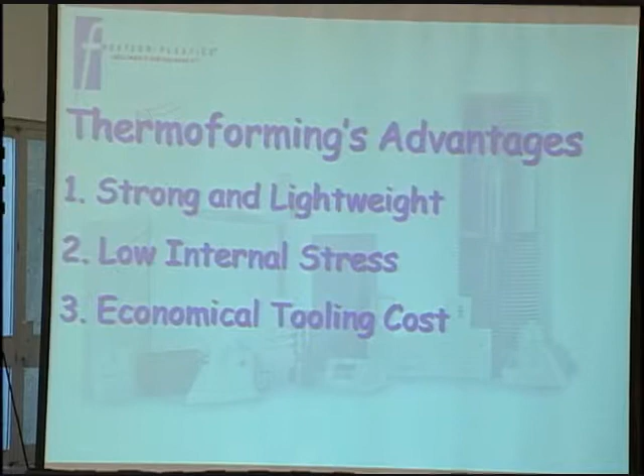So what are thermoforming's advantages? Why should we thermoform things in the first place? Well, first, it's very strong and lightweight, as evidenced by those packages you can't get open. They're very thin plastic, but they're very strong. They also have low internal stress, which gives them high impact strength. And they have low or economical tooling costs, so there's a big advantage there too.

For example, on the lightweight aspect, if you were to take a RIM part, a reaction injection molded part, and hold it next to an identical thermoformed part, there'd probably be a 25 to 40% weight reduction in the thermoformed part, and the impact strength would be nearly double.

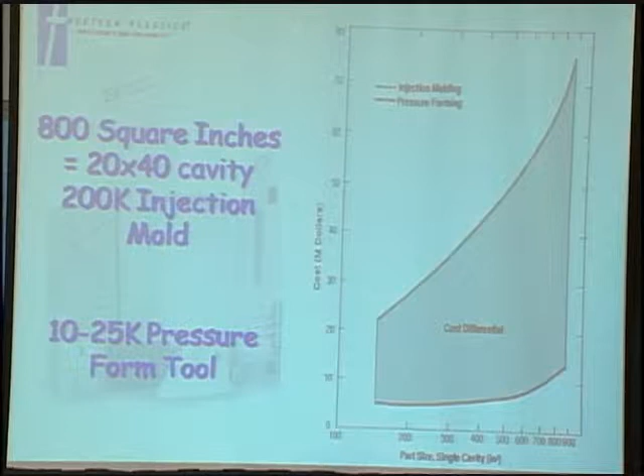The economics for tooling are pretty interesting. We've used a 20 by 40 cavity here as an example. If it was injection molded, ordering that mold in this country would be about $200,000. If you pressure formed it, it'd be about $10,000 to $25,000, depending upon complexity, slides, and how many undercuts you did. But there's a significant savings, and as the parts get larger, the savings get bigger. So when you start getting into parts that are 36 by 48, 48 by 48, 48 by 72, the cost difference between thermoforming and injection molding becomes really significant.

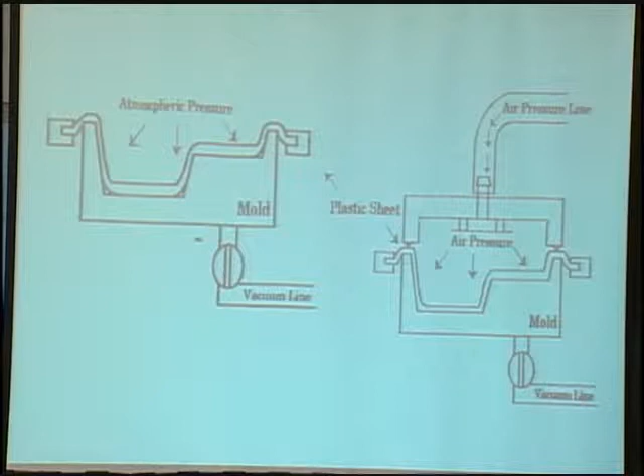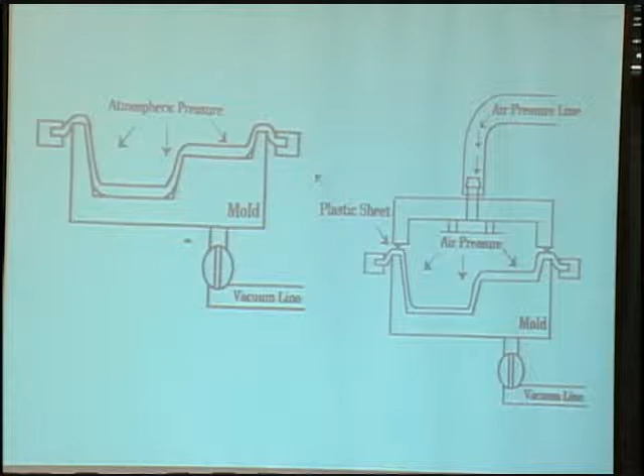The basic difference between vacuum forming and pressure forming is vacuum forming uses atmospheric pressure. That means the most pressure you can get on a part at sea level with a perfect vacuum is 14.7 pounds. If we seal it in a pressure vessel and pump 70, 80 pounds in there, now we not only have the 14.7 from atmosphere, we multiply that by 3 to 5 times. There are some machines, and we have one, that are capable of doing 268 psi, at which point you can pressure form composites.

Just another example of the difference in the way that the sheet adheres to the mold.

A lot of people use pressure forming in parts that are going to be lower cost, for example, than maybe an injection molded part. And quite often they're used in conjunction with sheet metal.

So we ask the question, what can you do with a square box? Well, you could just leave it a square box, and that's called a refrigerator normally, and they don't look very interesting. Or you can dress it up in front with a really nice cover, and that's what Hewlett-Packard chose to do on these particular units.

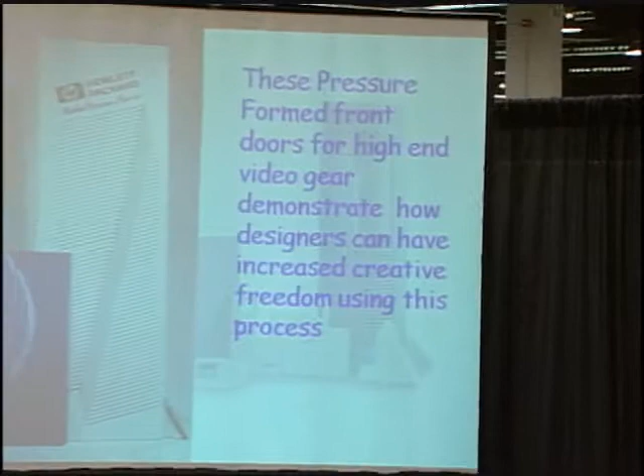And they were for high-end video gear. These were the first video online, on-demand servers there ever was, and they were trying to sell these to the phone company, and the phone company had started to buy them. And then the phone companies thought, well, why don't we just buy the cable companies? And that's why you have AT&T Cable today, and they kind of shelved this project.

Funny story, NYNEX in New York, a friend of mine happened to be the vice president of technology for this division of HP, and he's in talking about all the whiz-bang servers and electronics and stuff that are in there, and the president of NYNEX turns to him and says, 'Al, that's really a nice door.' I love that story.

This is that surgical laser we were looking at earlier. This was for general use, and the big use ended up being facial resculpting. It was the first facial resculpting laser, and they could knock sometimes 20, 30 years off of somebody. I saw some of the videos, and it was amazing.

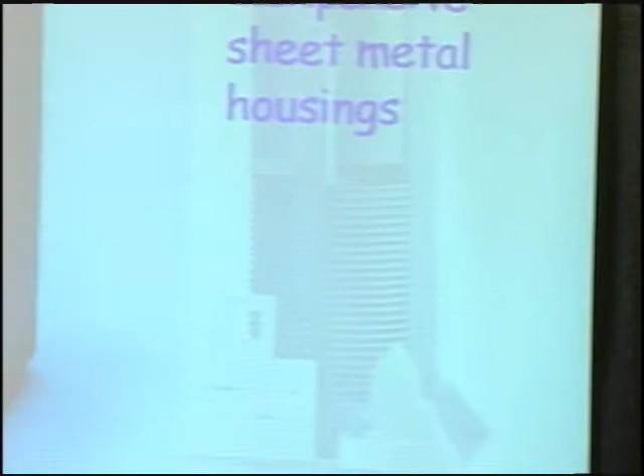Here we have another basically a square box, and simply by putting a cover on here, took a very inexpensive package and made it a very nice looking part.

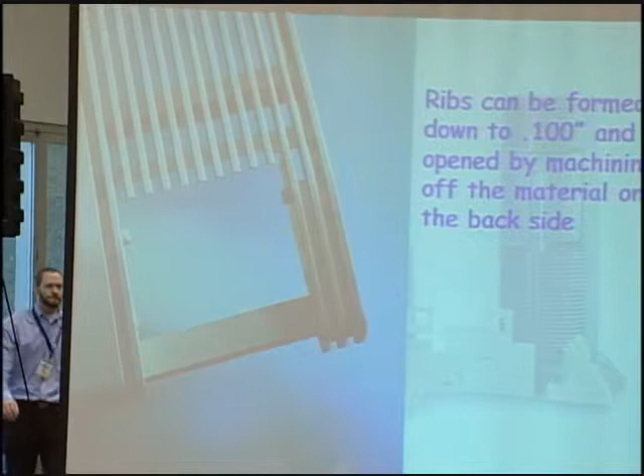Ribs can be formed down to 100 thousandths thick, so you can really maximize airflow through a part, and we'll show you a part later where that was very important.

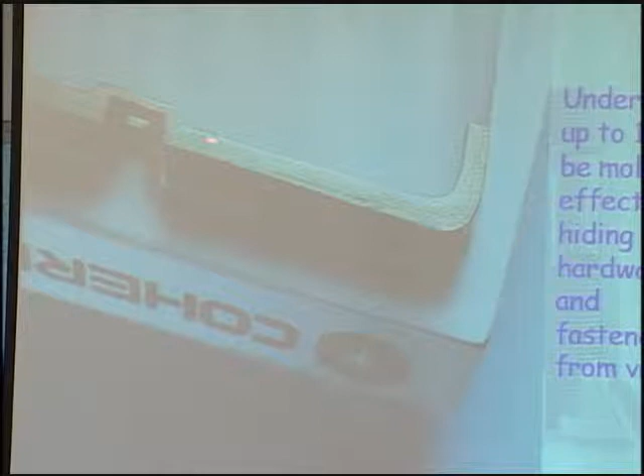Undercuts can be molded. Really, we say pretty much up to an inch, no problem. If you need something more severe than that, then we need to talk about the way it's designed, but generally a 1-inch undercut is not any big deal with a really good quality pressure forming process. Here's the reason for that. Now we've got all these recessed areas, we can hide all the hardware.

And the other thing we can do is we can mold features down as small as 40 thousandths. In some circumstances we can even mold features as small as 20 thousandths, raised features. And we've got a couple products in the booth that will demonstrate that.

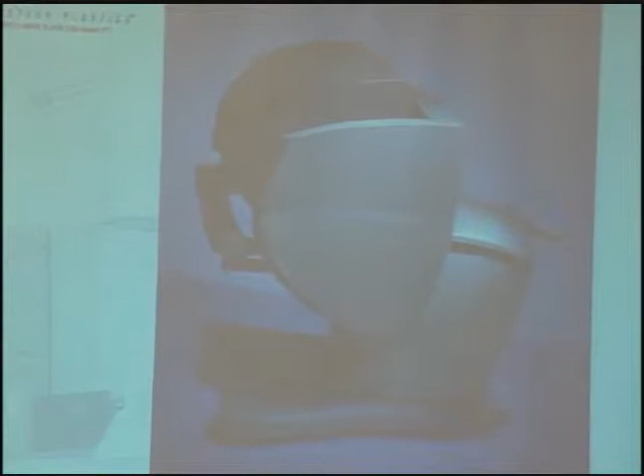Here was the first surgical robot. This is the Intuitive Da Vinci surgical robot that actually won grand prize here a few years ago for best medical device, and it won every major design award, and every major plastics, thermoforming, and manufacturing award in the country. And the difference, they've changed this quite a bit.

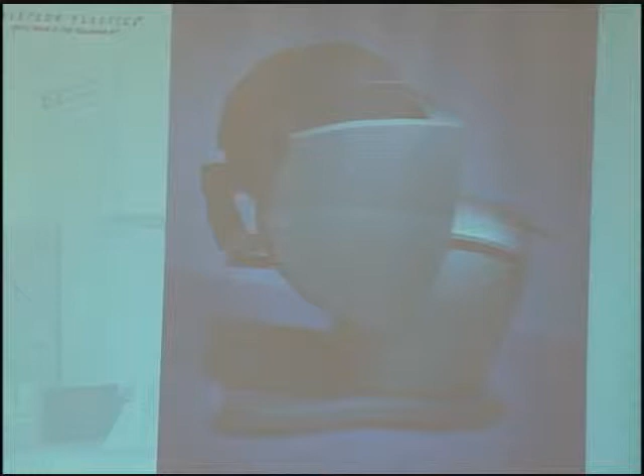At the time, all they had was cathode ray tubes, and they had to stick two cathode ray tubes in here to get the stereo vision. And so that's the reason this top cover is so big. If you've seen the newer Da Vinci, the top cover is much, much smaller because now they have some really good flat screens that they can put in there that are really high resolution, and it eliminated the need for a lot of the technology that we put in this part.

The surgeon would sit here up to 12 hours. So another thing that we did is we molded some undercuts along this side, because most people would have just trimmed that and it would have just been a sharp saw cut edge, maybe with some paint and been sanded down. But by putting a nice rounded edge there, when people were in there bumping it, it just didn't add to the aggravation of the doctor trying to work in a pretty delicate situation.

One of the things we like to do with people, we work with a lot of industrial design firms. We try to get in early on the project, because if we're in early, that helps us in the sense that we can help you with the technology needed to make these little improvements that are really only paid for once in the tool, and it doesn't really matter because the amount of time it takes to trim the part out is going to be the same.

This is another example of a square box being dressed up. This particular unit actually won an ID Magazine award back in 1989. But really the interesting part is the story behind it. When this company came out with this, it was the first desktop genetic reader.

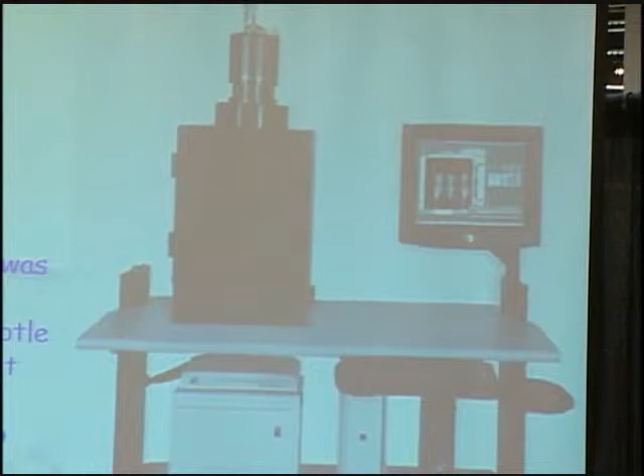This is a big camera up here, and they wanted to try and make this thing look a little more refined. So here's what they did.

They took the camera and they put it up here and put it under this translucent dome. This part's over in our booth, we're over in 1883 — there's my commercial plug.

This part's in our booth, and you can actually see this, but they put the camera up here, and this is where they put the mice, and here's the valve they use to turn on the gas, and the rest of the electronic equipment is down here for it. So they condensed this all down into one bay size.

They wanted a really nice monolithic look. They didn't want anything sticking out, so we molded in all sorts of undercuts on this so that when they were all done, they just had a super, super clean look.

The letters here that you see are raised up a quarter of an inch, and then the actual letter area is molded back down inside so that those are laser cut inlays and can sit down in there, so you don't snag anything on the edge of them by having them set back in there.

Here's another undercut. We were told by our tool maker that this wouldn't work, and they didn't want to finish the tools, so we said, look, just do what we tell you, we'll pay you for the tools whether they work or not. That's sometimes the argument you have with tool makers, because they don't know what you're doing and you don't want to tell them what you're doing.

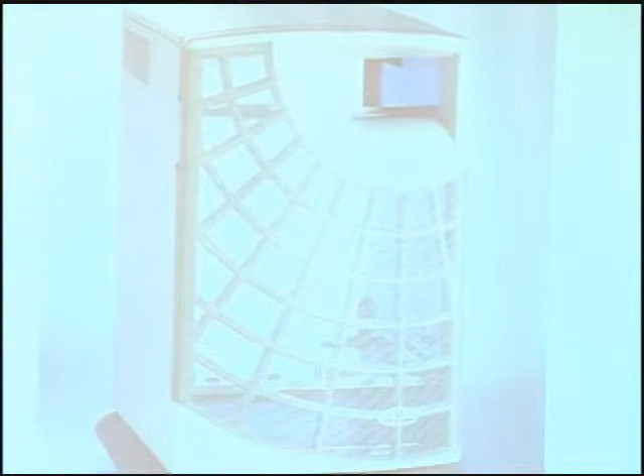This was, we jokingly refer to this as Spider-Man's server. The individuals, back when Lucent was still a standalone company before it got bought, this was a desktop server, and what they normally did is have these in a rack mount off in a server room somewhere, but every once in a while they needed one out by a desk or remote. So they came up with this enclosure.

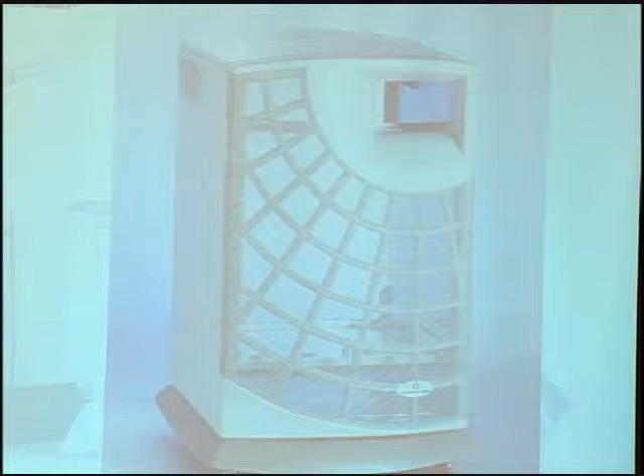It's really simple, a sheet metal box with a top and a front cover. They needed maximum airflow, and that's the reason for that design, and then this skirt down here. So there's the back of the front cover, and the front of it. The whole idea was that this perf was to go on, and it clips on the sides of the cover, with just one tab you bend over to hold it in place.

Here's another, let's dress up something that's in a rack mount environment. What they were trying to do here is, this was the first box that basically converted internet to cable. In fact, there's gazillions of these all over the country, and basically they got it so you could start getting your internet through your cable system.

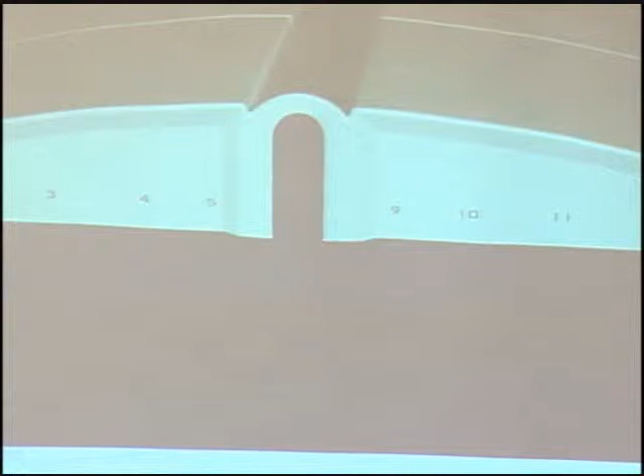But what they were trying to do is put a lot of information into this panel, so they wanted to know where all these were, and they wanted to get it underneath, out of the way where it wouldn't wear off. So we molded an undercut, and then they wanted the sides to be the handles, so we molded an undercut in over there. There's another better shot of it.

And again, it all had to slide into a single rack mount bay, and that's the reason for the compact undercuts for the handles.

This is an example of, this was a nice ID Magazine Award winner for us. We're happy about that. But this is an example of when designers don't talk to their manufacturing people. We got the drawing for this, and we were told, hey, here, make this.

So we said okay, it had a big undercut here, and a big undercut here. We ended up making it, got it over there, and the guy says they're breaking. We said, what do you mean they're breaking? He says, well, they're breaking. So I went over there. It turns out that they had this 35-pound cable that goes in the back side of this, and they hadn't told us about it. They just had a shape they wanted to make.

This is, I'll just make the shape. So we said, oh, well, you didn't tell us it needed to have any structure. So we went back and developed some structure for them, and we had to put an insert in this that was machined out of several pieces and keyed together. They also had a deep undercut on the other end, and this is a clamp that held it down.

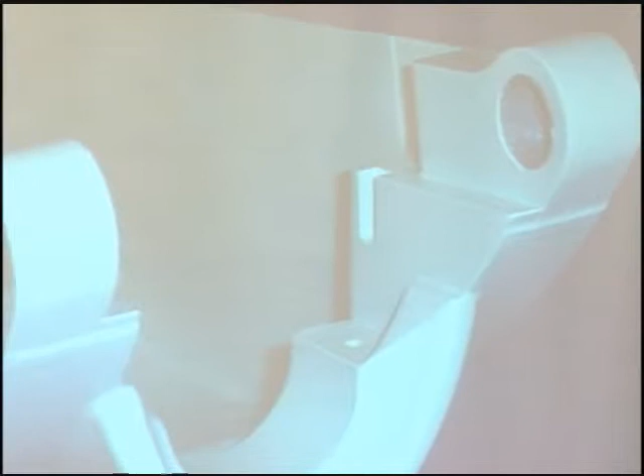But here's what we weren't told about. In fact, this part probably would have been better if it had been a casting from day one, because of the structure needed here. But we were able to go in, because we have machining capabilities, and machine this, and there's a number of different key features that hold that together, so it can hold that 35-pound cord over and over again, being flexed up and down. We never heard of the part ever failing. So we came up with a nice engineering solution.

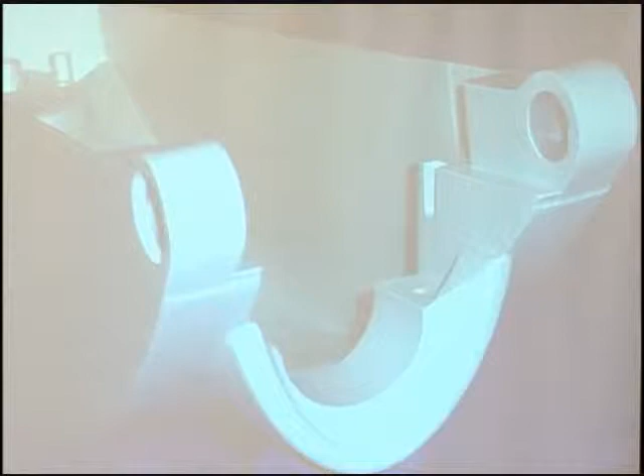But sometimes in thermoforming, people who have machining capabilities like we do can make a big difference in how your product comes out in the end. And it did get a lot of nice publicity in the end.

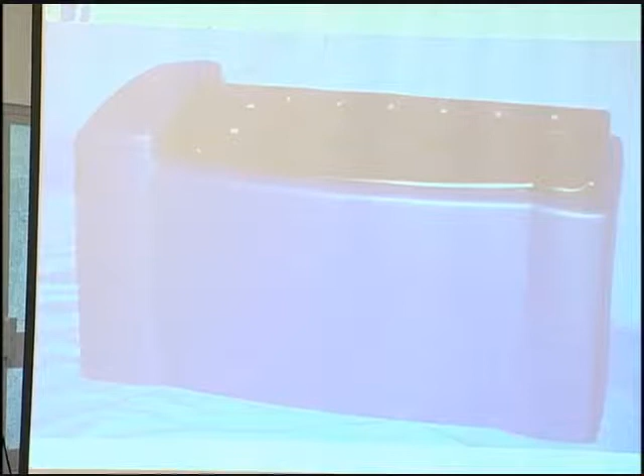Came out looking really clean. This unit here is a DNA sequencing unit, chip tester, molded in two pieces. This is a clear polycarbonate top, and this is an ABS base.

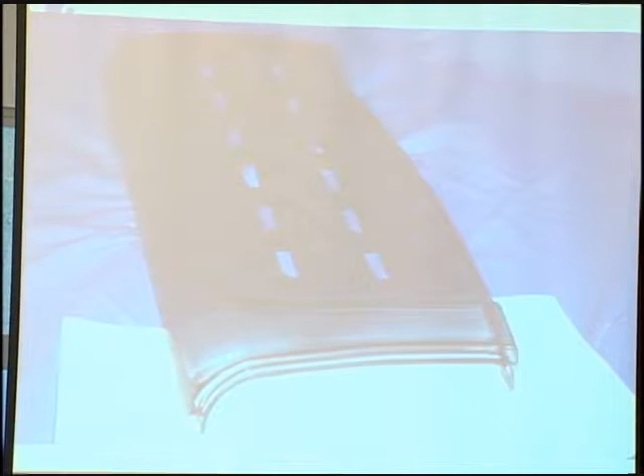One of the things is we molded this ABS base, and you can see the undercut here on both sides, and then the part extends down. The reason for that was to get the part for fastening to go past the trim line and the opening line where it could be attached underneath and leave a nice, clean, presentable line here.

It was interesting, we were getting some static about the cost of the tooling, and they finally decided to go ahead, and then when they got it, they said, oh, we get it now. You were molding an undercut so you could glue it from the back so nobody could see any of the seams. I said, well, what did you think I was going to do? Just trim it and glue it on the top? And he goes, well, that's what the prior vendor did.

We thought, okay, well, maybe we had a better idea. On the ends, what we did is we again used retractable slides in the tool, and that gave us a nice uniform area on the ends, so the vents all look uniform, and you could put the perf behind them very cleanly. Again, very, very tall, difficult draw part, but came out very elegant.

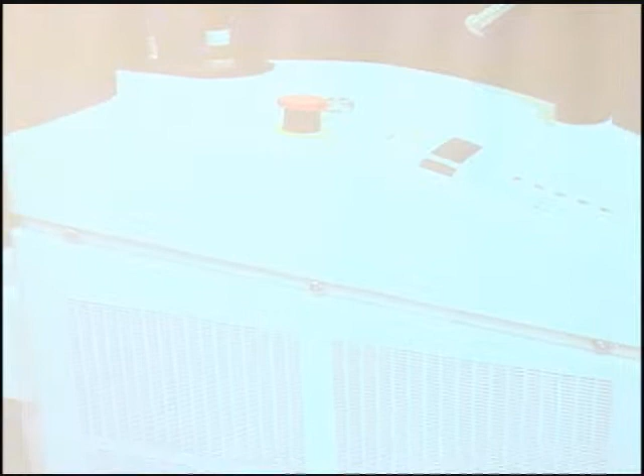This is a dental laser that we did a while back. This is a pretty interesting unit. This is not very attractive, and we did the industrial design on this, and this is what we came up with. And so you can see again, liberal use of undercuts to match up with lines.

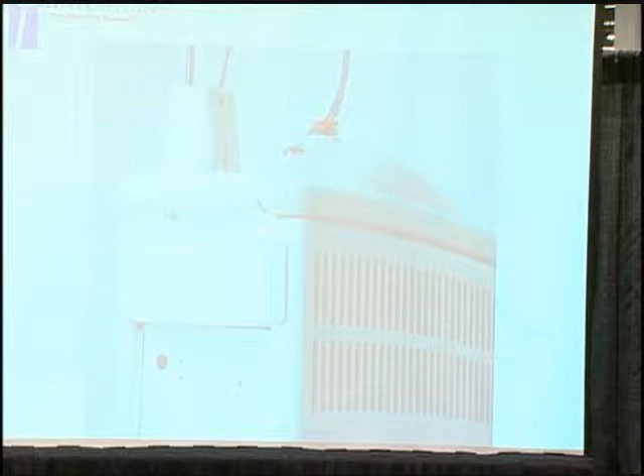This was molded in color, and then the rest of the panel was painted because this is the bumper. So we paint that, we molded in this color, molded in the texture, and then the rest of that part is painted the color, and the bumper absorbs all the shocks. A little bit of a difference, wouldn't you say?

And then this is one of the last major industrial design projects we were involved in. This is an ultrasound generator for St. Jude Medical heart ablation unit, and these look like beauty grooves, but there's really ventilation slots hidden in there. We molded in a cord wrap back here.

Here's a shot of that undercut on that. It's a 6-piece removable core to get that molded in, but definitely worth it as far as keeping that weight down on the machine and having a complete seamless product back there. And that's the final look of it.